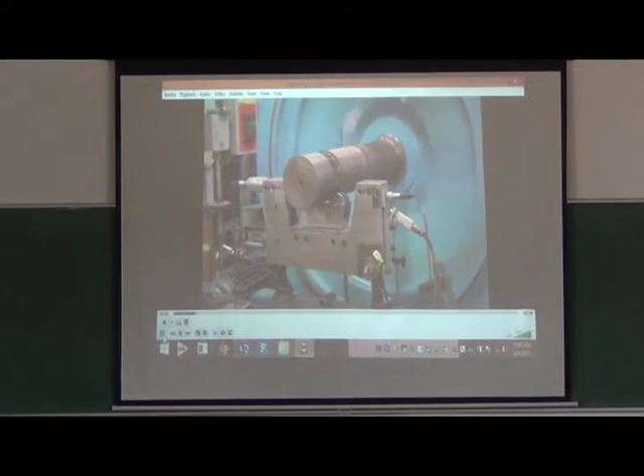So before balancing it was shaking like this.

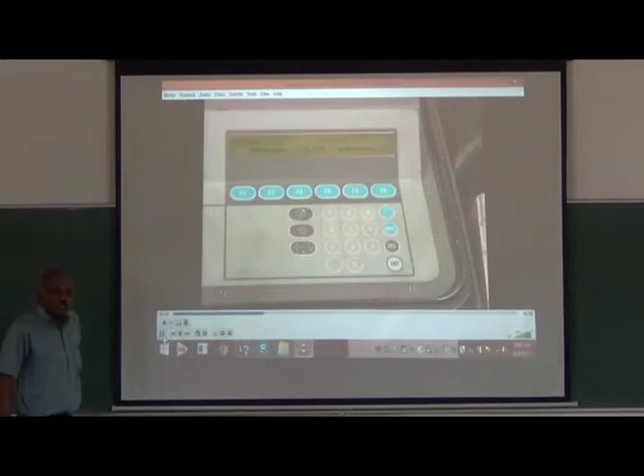You can see some sensors here. The impeller will be placed and you have the accelerometers which will measure the acceleration. Then there are a few stages of measurements for balancing, and that's what they are going to explain.

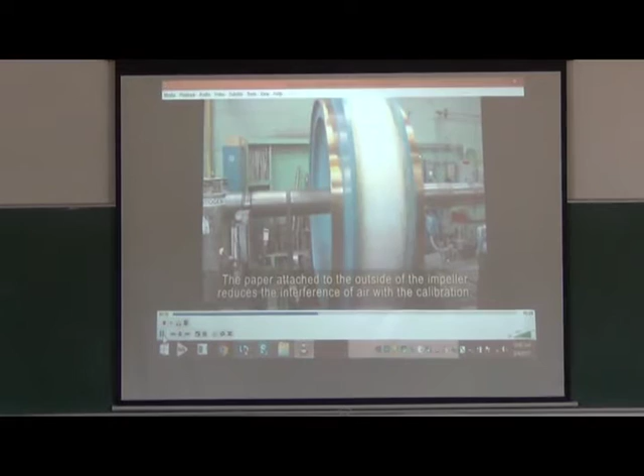So the impeller is first run, that is called a trial run. Then they will add some known unbalance to the system, and measurements are done again. Based on that, it will be able to calculate what the balancing masses are, at what angle, at what radius it should be placed, and that's what they are fixing.

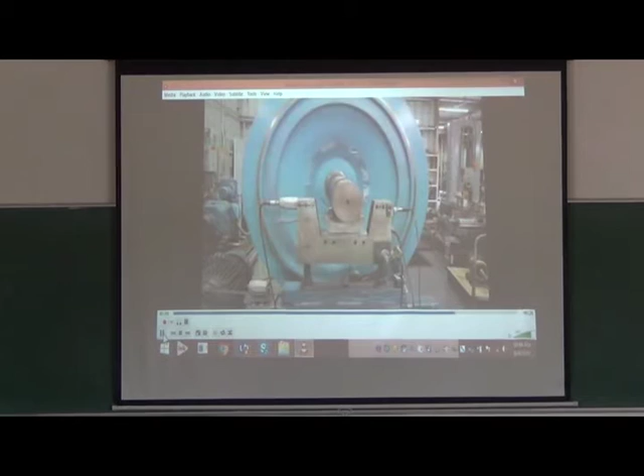So you see that the masses are added to achieve the balance. So what you have to do is, in a balancing machine, you keep your rotor running; that is called the first run or trial run.

Then, next run, you add an unbalanced mass intentionally at a known location and known radius, feed that into the program, and run it again. Then it will be able to calculate what the original unbalanced mass is, and tell you where to add the correction masses that you have to weigh and add.

So this is the procedure to be followed in a balancing machine. I will show you one more video.

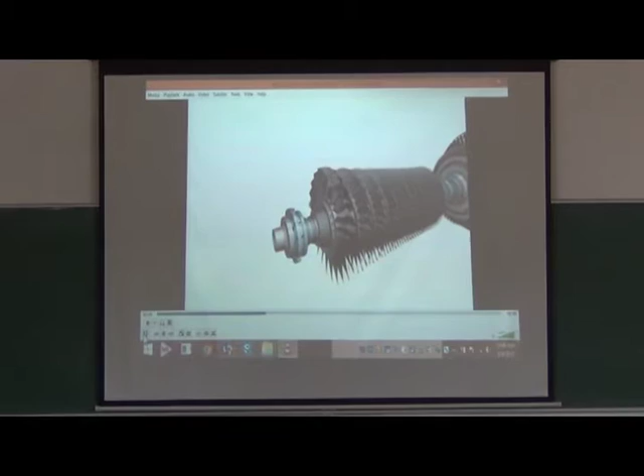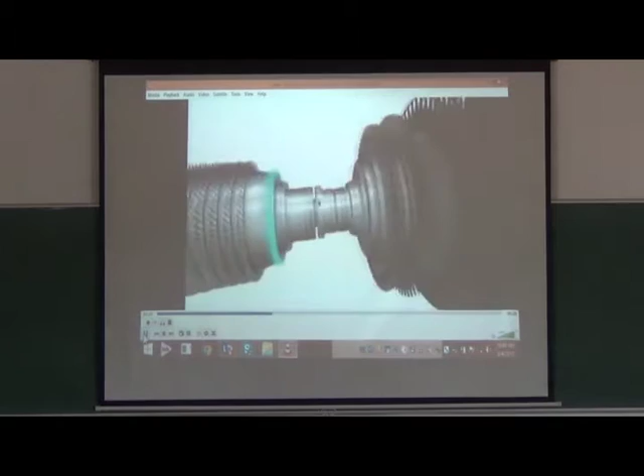Here you can see that the turbine has a number of rotor blades. You cannot disturb these blades for balancing because they are supposed to allow the flow of steam through it. So they have provided special planes, added rotors, on which the balancing can be done specially.

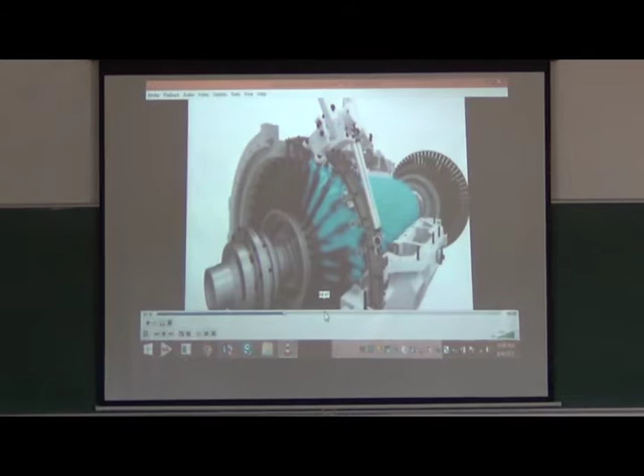I think there's some sound.

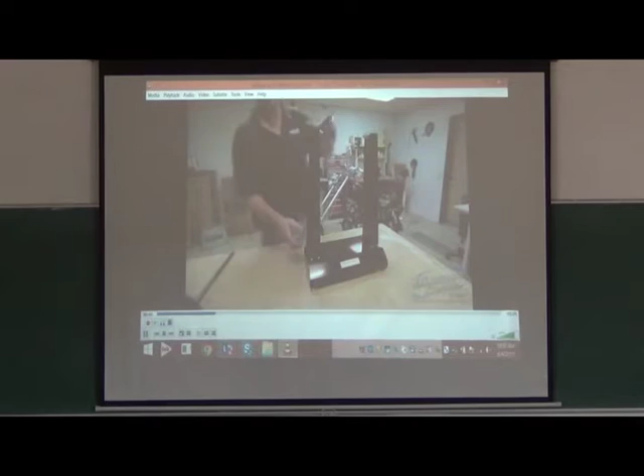Because this is going to be in a gravitational field, you have to align it properly, otherwise that itself will induce some error in your calculations.

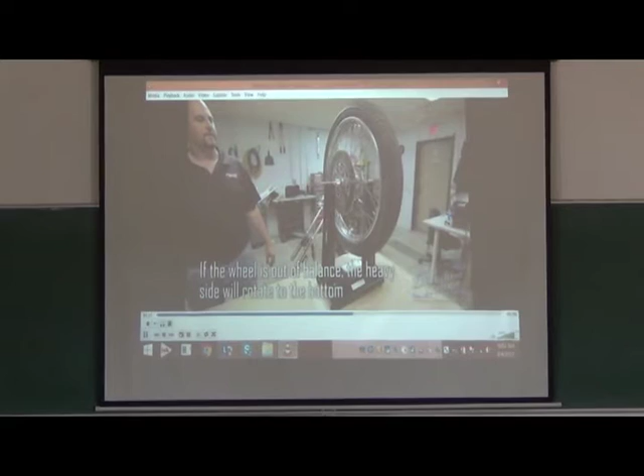Now it is suspended on bearings so that it is free to rotate. If there is any static unbalance, it will come to stop at the bottommost point.

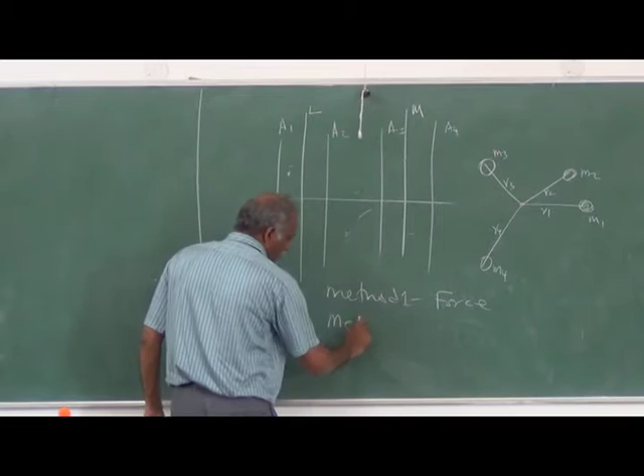I said there are two methods. We discussed one method last class. Method 1 can be called the force method, and method 2 will be called the couple method. So you have the force method and the couple method.

In the force method, if you quickly recall, the idea is taking one mass at a time and finding out the balancing masses to be provided in two planes. So we work out the balancing masses to be provided considering one mass at a time, for example m1, and find out these two.

Then you look at the second mass alone and find out the balancing masses to be provided in planes L and M. Similarly, you proceed for each and every unbalanced mass, and you will get to know the balancing masses to be provided in plane L.

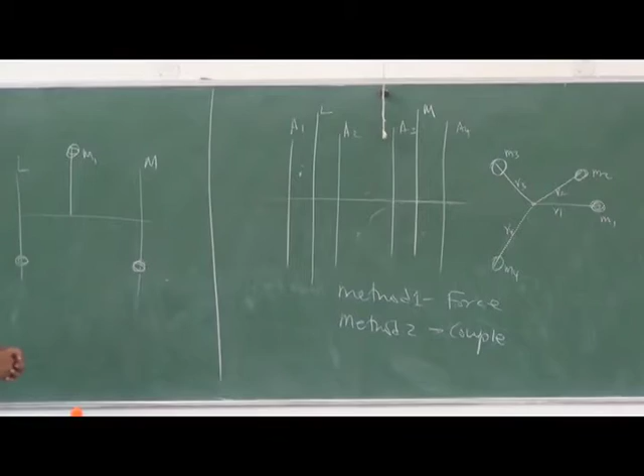Then you find out the resultant, not the equivalent, the resultant mass to be provided.

So once you do that, you will get the net mass to be provided at plane L and M, so that if you fix it there, it will cancel and balance the total system. That is the principle of method 1, the force method.

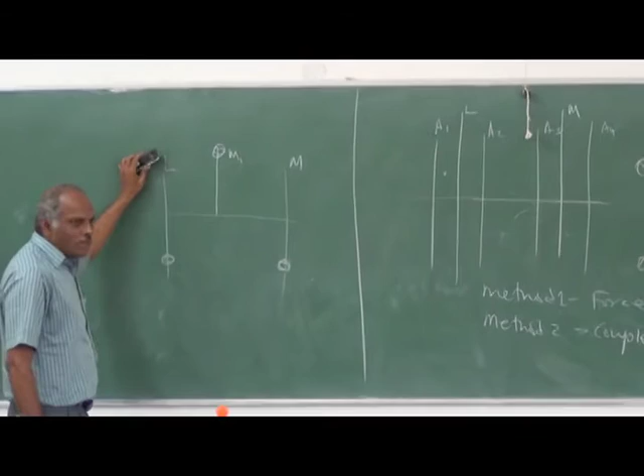Method 2 is the couple method, in which the principle is a little different, but I'll tell you that if you calculate the balancing masses to be provided at plane L and M using any of the methods, it should result in the same values. There should not be any difference.

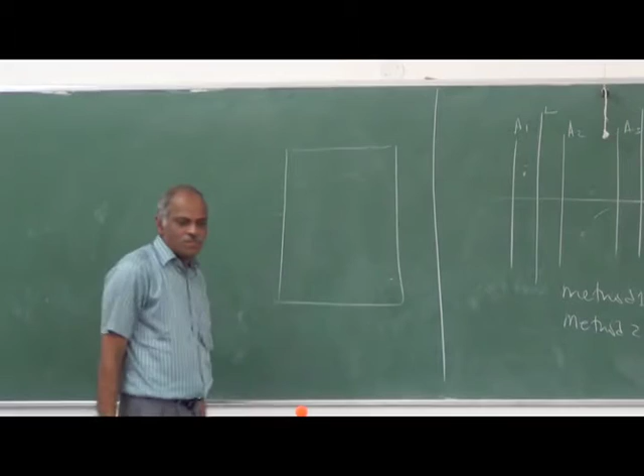So what is this couple method? You consider plane L, or any plane. For example, this is my plane that is matching with the board, and my unbalanced masses are like this. The balancing planes are perpendicular to this, and my unbalanced masses are there.

Think about only one mass now. This is going to, as it rotates, produce one inertial force in this direction. So I will transfer this force to this plane.

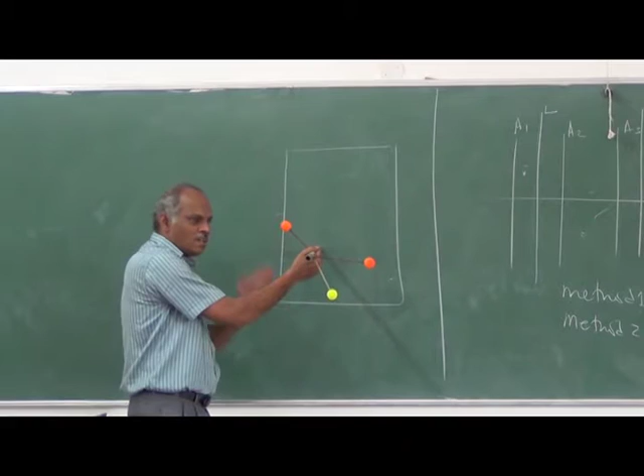Similarly, I will transfer all the inertial forces produced by these masses in this plane and find out the net forces and couple, and balance it. Find out the equivalent force that you have to give to balance the system of forces, and find out the equivalent couple that should be introduced so that the system is balanced.

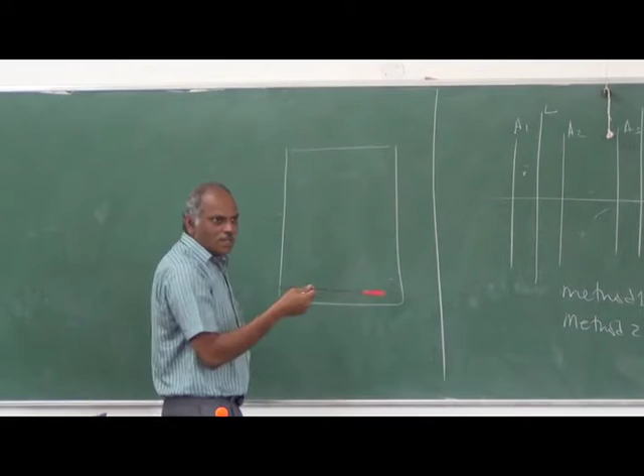So instead of taking 4 at a time, you think of one mass at a time. For example, there is a mass M1 located at a particular distance D. This magnitude of this force vector, you have to think of a shaft here. The magnitude is given by m1 r1 omega square, and the distance between that plane and this is supposedly L1.

This is your force, and this force is here. I shift this force away from this plane, I want to shift it here. Then, as you have learnt, if I shift the force F to this plane, it will have a force and a couple. So this is the force, this is the distance, and at what direction the couple will be.

So it will be the couple vector, introducing a couple, as we have been discussing. But if you think of this couple, it will be like this from here. So the vector direction will be like this. The force vector will be in this direction, and the couple vector will be in this direction.

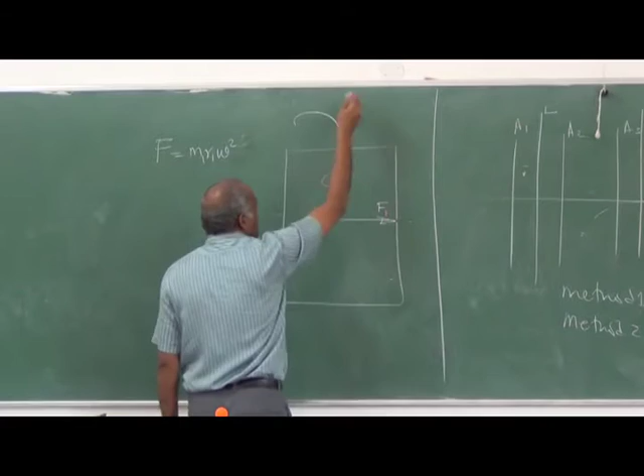That force, I am shifting it to this plane. When I shift it, it will have a force and a couple. Earlier we were not representing that couple as a vector, we were just saying the couple is represented like this, that's all, or we represented that as a torque T. But if you represent it properly as a vector, it should be perpendicular to the plane.

So here the direction is important, because we have a force here that is shifted by the same magnitude and the direction is conserved. But when you come to the couple, it will be here in the anti-clockwise direction, meaning it will be going up. You can check like this, it's going up. So your couple vector will be like this.

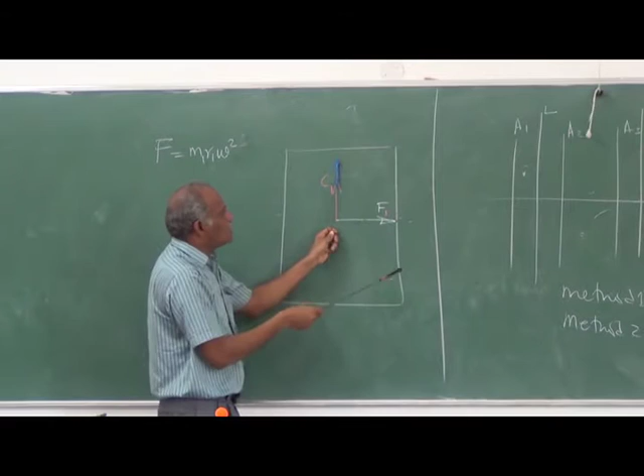Your force vector and couple vector will be there, perpendicular to each other. There is no issue about it, both will be perpendicular to each other.

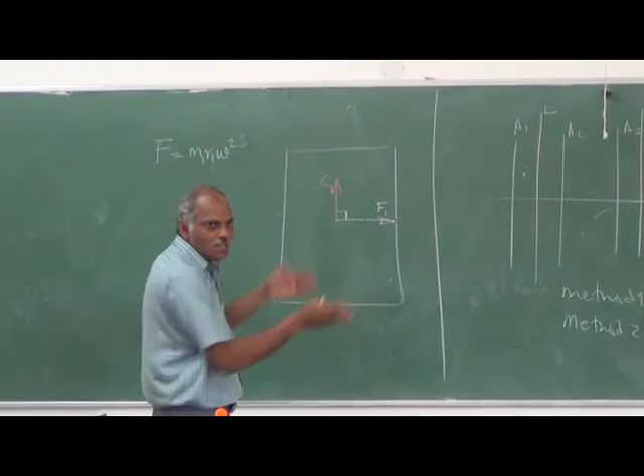So in method 2, what I will do is transfer the force, the inertial force created by every mass, into a single plane. In this case I will take this plane as L. So I have taken, for example, A2, and I would shift it here.

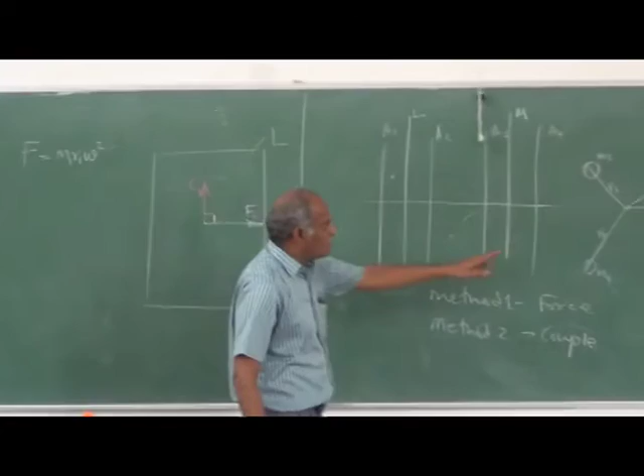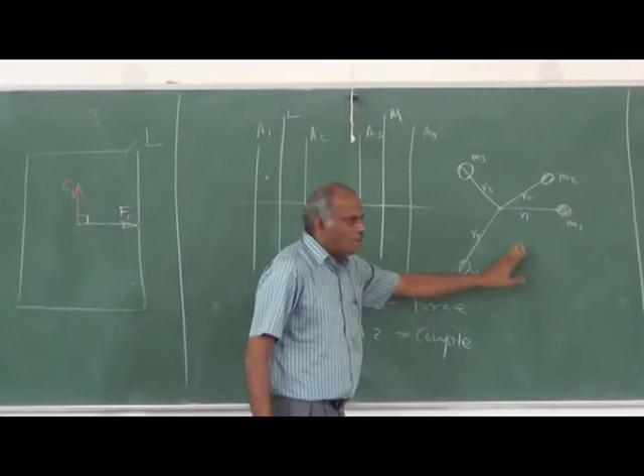Suppose I take the mass at A3, the unbalanced mass A3. Again that will introduce a force. This is how I shift it in principle. If you look at our specific problem here, this is the orientation of the masses. Let me take like this, I'll go by this. I'll have M2, the orientation of the force created by M2 will be like this, that is F2.

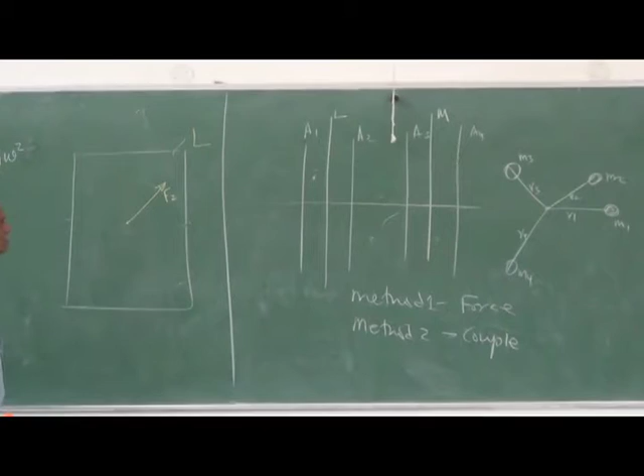And the couple is represented like this. I'll now take A3, that is a plane where M3 is there.

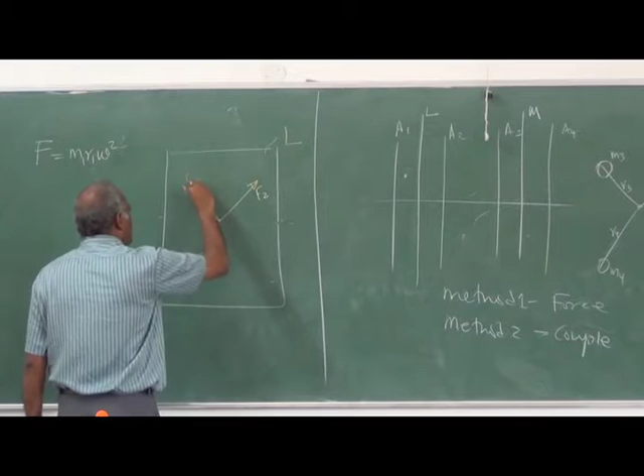So the force will be along this direction, that is your M3. So I can take that M3 like this, that is your F3. The force, and the couple created by M3, will be perpendicular to this.

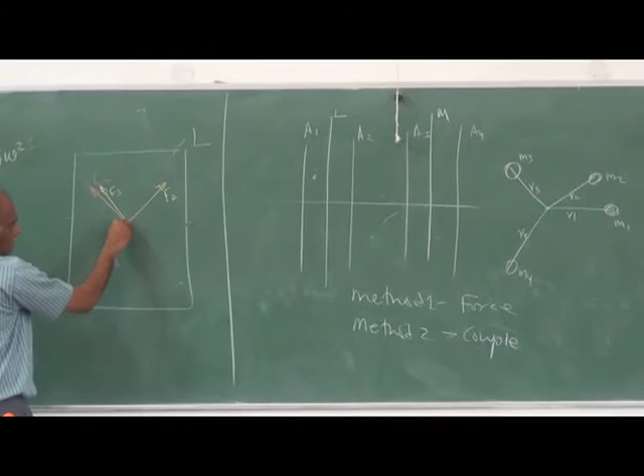That's C3. Then you have A4, that is here in this direction, so the force will be like this. This is F4. The couple will be perpendicular to it, that is C4.

The forces created by each unbalanced mass and the couple are represented like this. But I have not talked about A1.

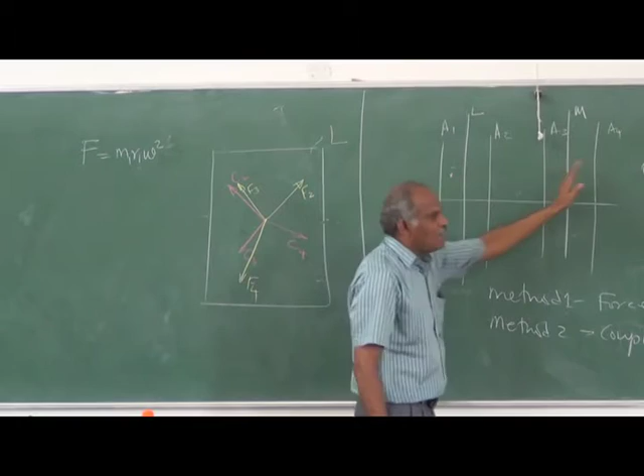The reason is that the difference between A1 and the other three planes is that A2, A3, A4 are on one side of the plane, whereas A1 is on the other side of the plane. So on the other side of the plane, the couple will be in the opposite direction.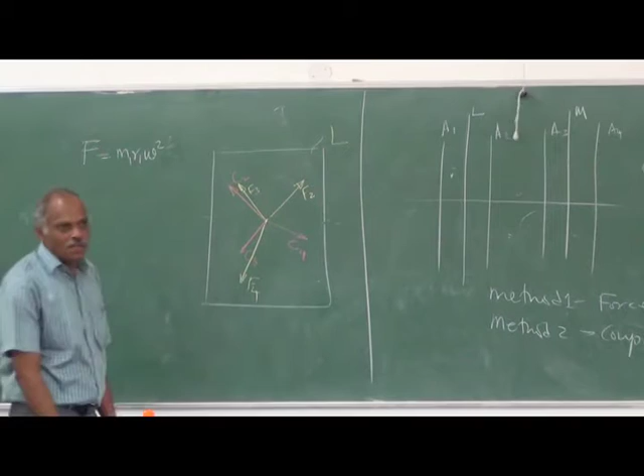So if I take M1 here, see what I have done: you check that the force F2 is here, and the couple is there by turning this in the anti-clockwise direction. The force vector is there, the couple vector is turned, but the direction is measured by turning this 90 degrees in the anti-clockwise direction. This is what happens to masses located on one side of the plane.

For the other side of the plane, if the mass is located there, the force is like this, F1, but the couple will be in the opposite direction, it has to be turned like this.

So the principle that we are using here is: shift all the forces to a single balancing plane. The procedure, or the important point to be noted, is that whatever mass is on one side of the plane, the couple vector will be turned by turning the force vector in the anti-clockwise direction. For the other side, it will be in the opposite direction, that is clockwise.

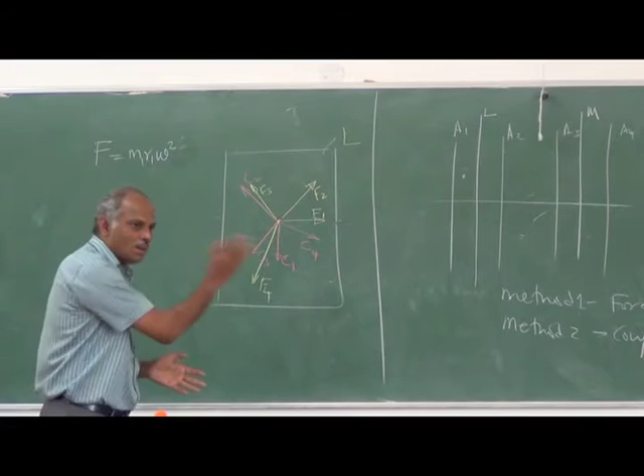So that is the basic idea. Now effectively you have transferred all the forces and couples to a single plane. Do you have any doubt?

Now what we are going to do is find the value of this couple, which we have not discussed yet. The value of the couple C is given by, for F1 this is C1, that is M1 R1 omega square into the distance between that plane and this, suppose that is L1.

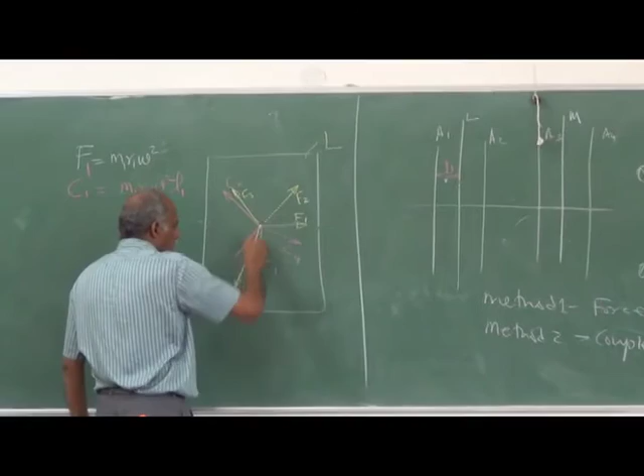Okay, so here you look at the couple vectors and force vectors. Drawing the force vectors is easy because you simply find the angle at which the masses are kept, and draw in the same direction. F1, F2, F3, F4 will all have the same orientation at which the masses are located.

But what about the couple? That is the nuisance. You have to see that it is turned by 90 degrees. If it is on one side of the plane, it should be turned in one direction. The other side of the plane should be turned in the opposite direction. That is what you have to do carefully.

Now let us ask whether any simplification is possible. In the balancing problem, in the first method, instead of drawing the force diagram, if you ignore omega square and just take the quantity M1 R1, it still represents the scaled down version of the force. It served the purpose. I don't have to calculate omega square every time and multiply by it. So for the balancing problem only, the force diagram can be a scaled version, dividing by omega square.

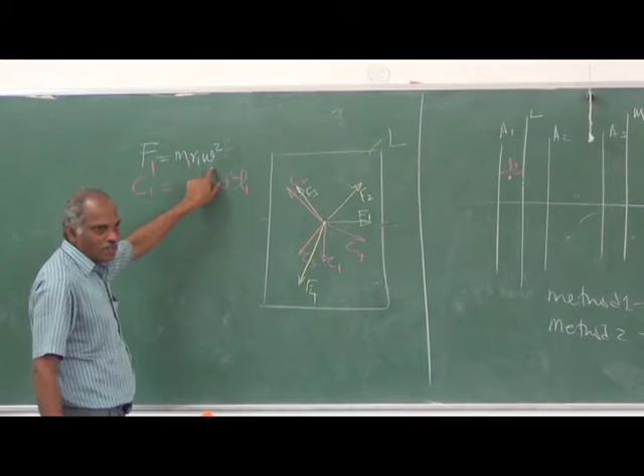Here, in a couple, also we will take omega square out, but is there any other way to avoid this confusion?

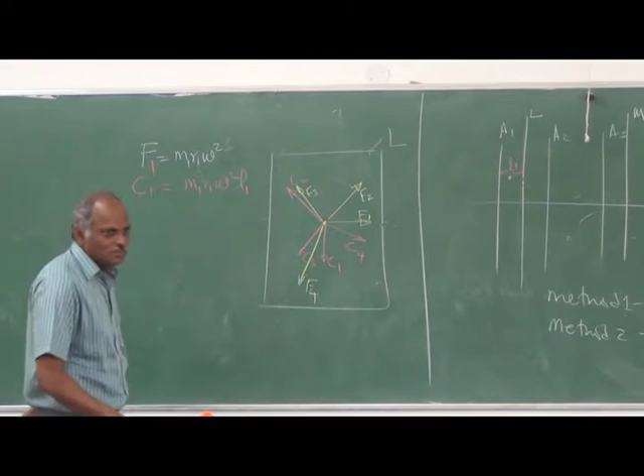So what will happen if I turn this entire couple system by 90 degrees in the clockwise direction? So now what I am suggesting is turn the couple vectors by 90 degrees clockwise.

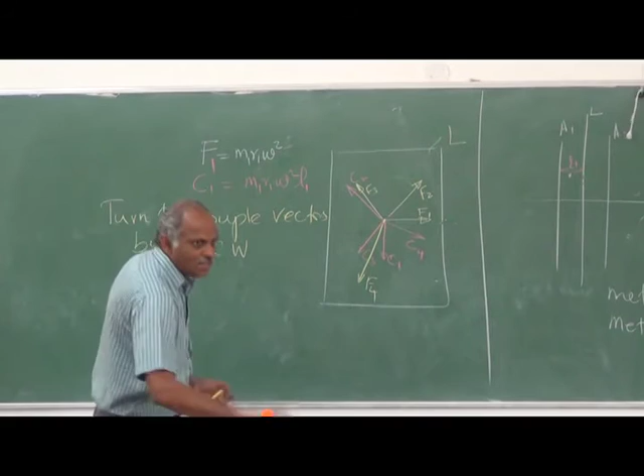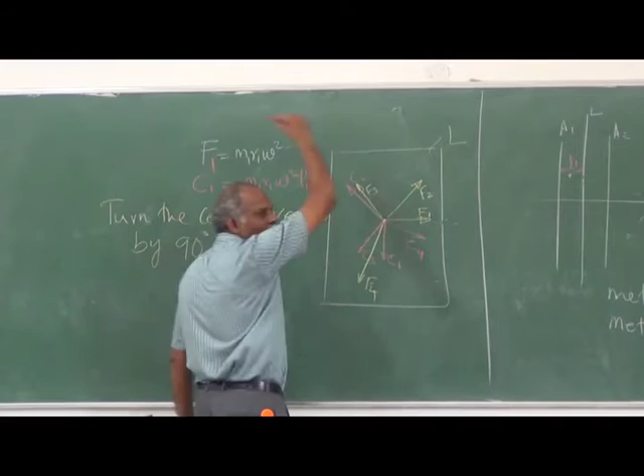Listen carefully. What will happen if I turn each couple vector by 90 degrees clockwise? So this is the couple vector C2, turn it by 90 degrees, it will be along the force vector. C3 if I turn by 90 degrees it will be along the direction of the force vector. C4 if I turn it by 90 degrees it will be along the force vector. C1 if I turn it by 90 degrees like this, it will be opposite to the direction of the force vector.

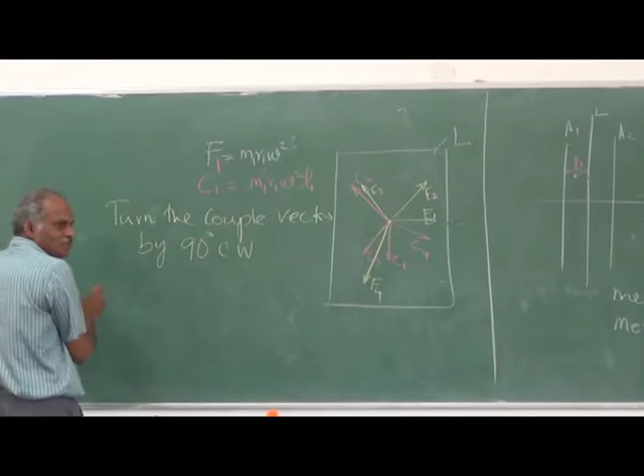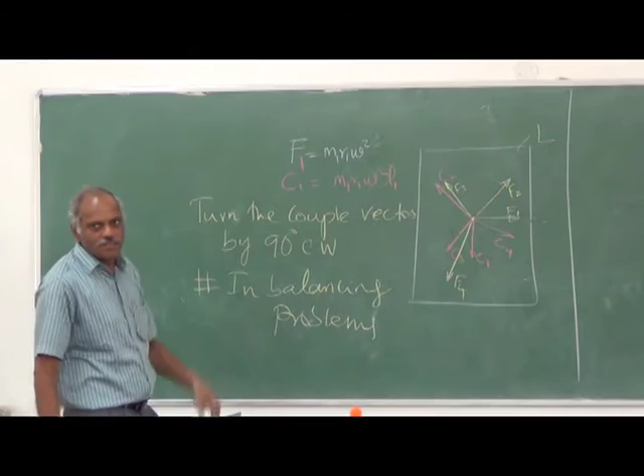So in balancing problems only, be very careful not to repeat this in other places. If you turn the couple vectors by 90 degrees clockwise, the direction of the couple vectors becomes very simple.

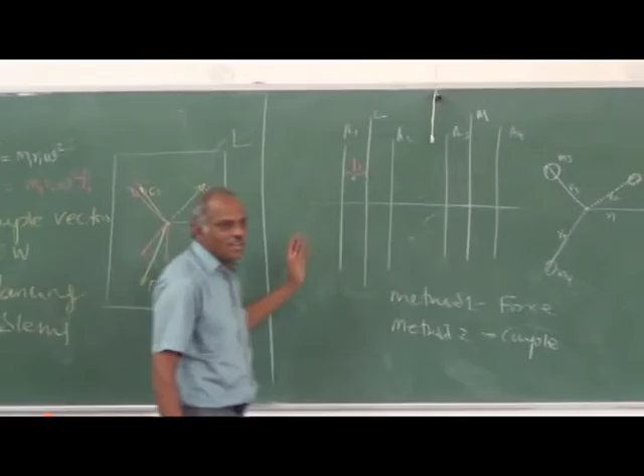Isn't it? So we are not violating the fundamental rule, we are using this particular small violation so that it will be easier for us to draw the couple vectors of these forces. Do you have any doubt, please?

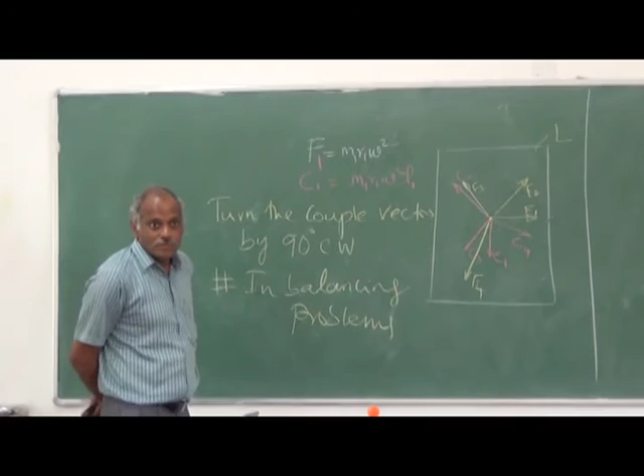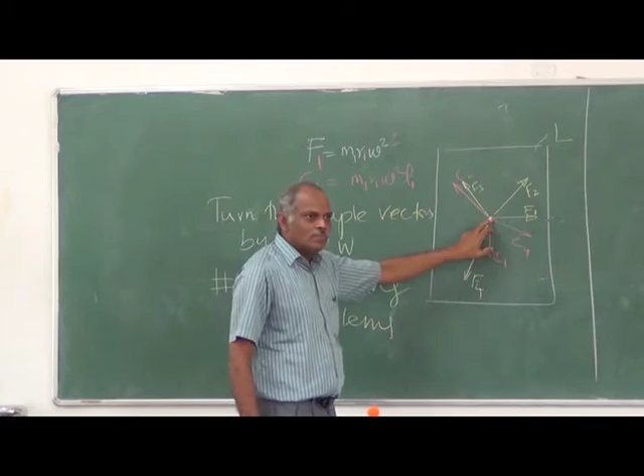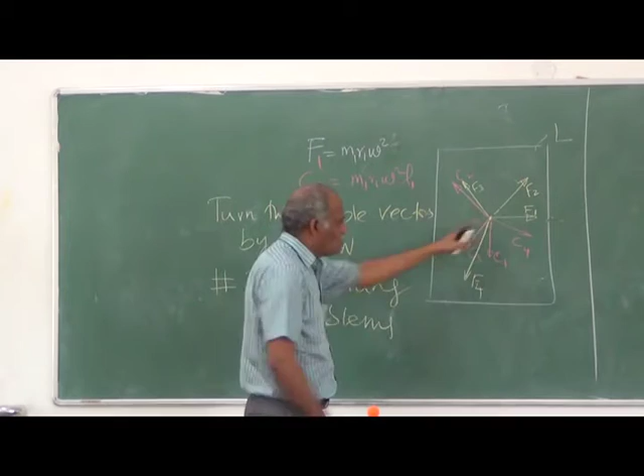So we are shifting the forces created by this into a single plane, and you are having a system of concurrent forces, a system of concurrent moments. So the couple vectors, if you draw the polygon using this couple vector, it should close. If it is not closing, then it is not balanced.

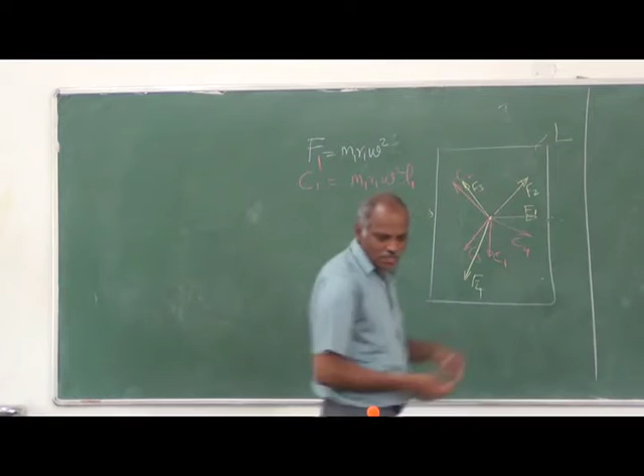Now what is the next step? Now you know how to compute the magnitude of the couple vectors. For the balancing problem only, you are permitted to draw them in the same direction as the forces, so that is easier for you. So draw the couple vectors of each one.

The couple vector of M1, you see the direction, that is M1, that is on the other side of it, so this will be your C1, and this will be your C2, and this vector will be representing C3, and the couple of this is C4. These four couple vectors are represented like this.

Now you draw the polygon. So you take it in any order. For example, I take C2 first, then I put C3 over here, then I can have C1, then I can have C4, like this. Now I have to find out, for equilibrium, this couple vector polygon should be closed. So I have to introduce an equivalent couple.

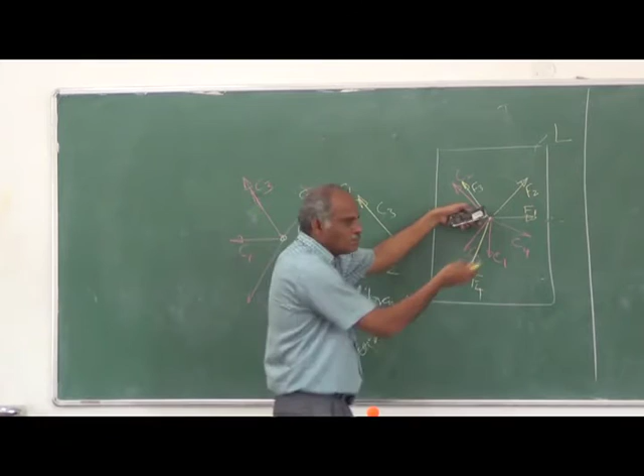How will this couple be produced? This is the equilibrium couple that you worked out. So this is going to be something like some mass at some radius, and it is omega square - though omega square is not taken consistently for all couple vectors. It is at a particular length L. So I have to introduce another force, another mass in this orientation, so that it will produce a couple vector that will balance it.

So in this system, what I have to do is introduce a couple in this direction. Let me rub this. So when it comes here, it is going to be your equilibrium couple.

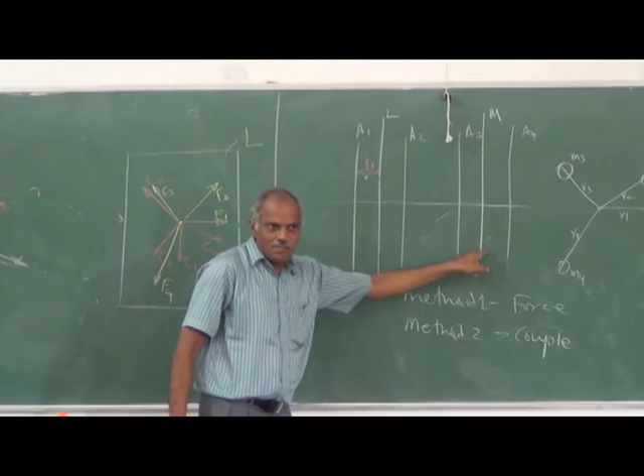For producing a couple, the force should be away from that. Where will I introduce that? I will introduce it in a balancing plane M. I have one more balancing plane M, and I will introduce that mass which will produce the necessary equilibrium couple. So this is the equilibrium couple produced by balancing, putting the mass at M.

So its magnitude, this measured value, is coming from the mass M. Then the distance between the two planes is D. Omega square is anyway not taken, so this is your value. What you have to find out is that M.

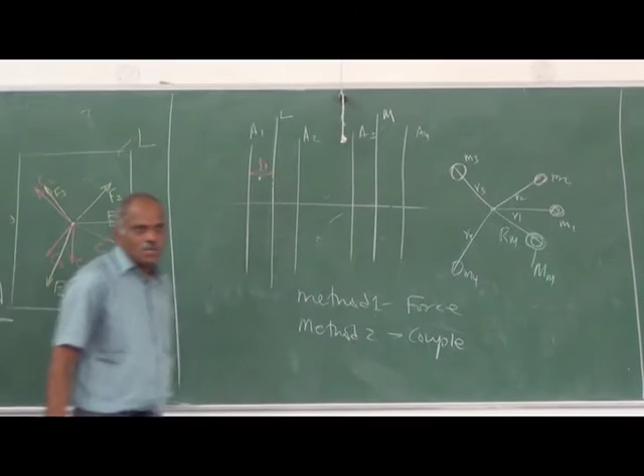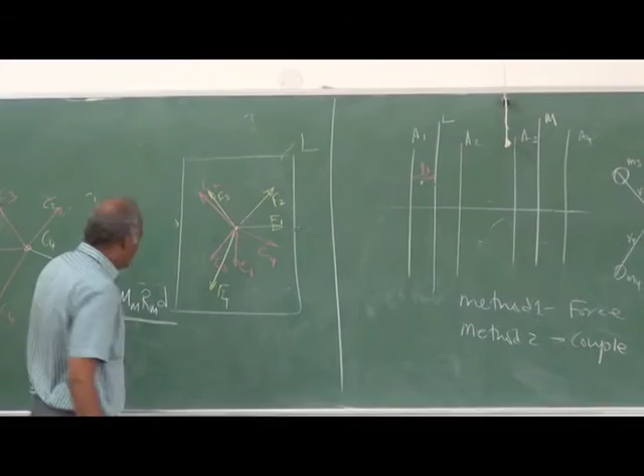So in this direction, preferably, this is the direction in which I will put the mass here at radius Rm in the plane M, so that when the force created by this is shifted to this plane, it will produce this equilibrium couple, and also it will introduce the force.

Think of it this way: now I am providing one more mass here at an orientation. I am going to shift that. When I shift it, I am sure it will produce a couple that will balance all the couples, but the force will come into existence. So when I introduce that here, you will have a force that is F.

And the couple of that will be in the perpendicular direction here. I think that is Fm - originally it will be Fm. That will be exactly at 90 degrees.

So what we are doing is introducing a mass, the balancing mass, at the plane M. When you shift that here, it will produce a force and a couple. This couple is the equilibrium couple, so the couples C4, C1, C3 and Cm together will balance each other. So I can forget about that, but that particular point is taken care of.

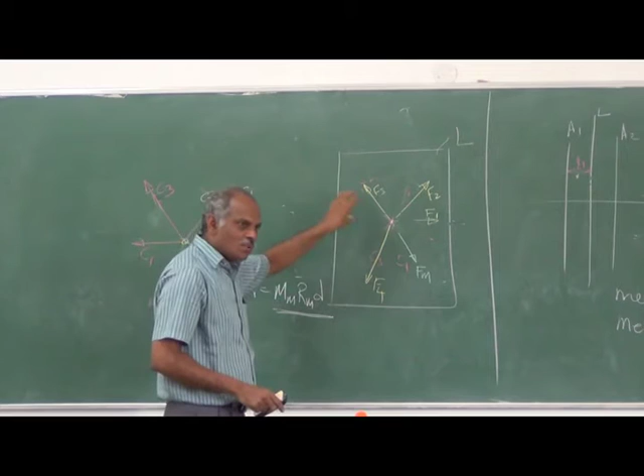So what is left is you have a system of forces to be balanced. What we do is draw a polygon and find out the closing side of that polygon, because you still have to find out the equilibrium force only. That is the mass to be placed in plane L, because you require only force, no couple, so that can be achieved by putting the mass only at this plane L. So that is the logic of this method too.

You have any doubt, please? Correct. So now when we are introducing the equilibrium also, over that also, should the original direction of that also be like a 90 degree? No. These are couples rotated by 90 degrees for convenience.

So whatever direction, that is the direction at which I have to provide the mass also. That is how I have decided this direction of the mass. So obviously that force will be in that direction, because this plane is on this side where everything will be considered to be along the direction of this. Suppose the plane is on this side, it will be in the opposite direction. Did I answer your question? Okay.

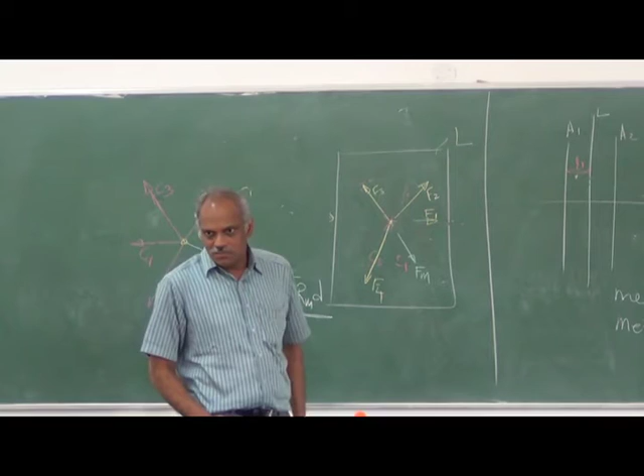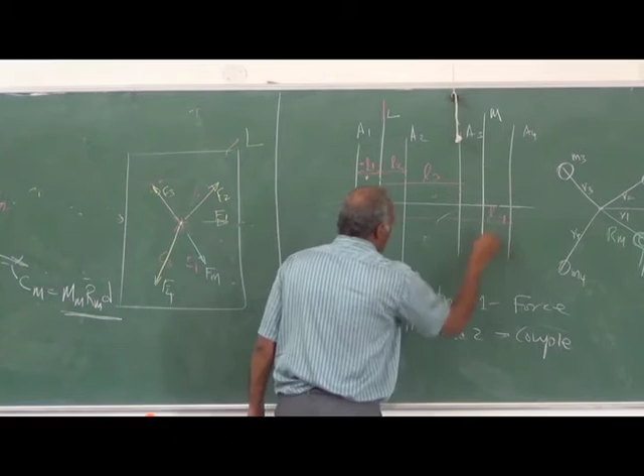So this is where you are vulnerable to make mistakes. What we do is, to know which side is plus and which side is minus, we can do a very simple thing. Taking this plane L as a reference, about which you are going to transfer everything, this side you can say is minus L1. Whatever distance you mark here, L2 is positive, L3 is positive, L4 is positive, this distance D is positive. By assigning the distance from this plane L, with one side all positive and the other side negative, automatically when there is a negative side, you are bound to draw the couple vector in the opposite direction. That's the way you can do it.

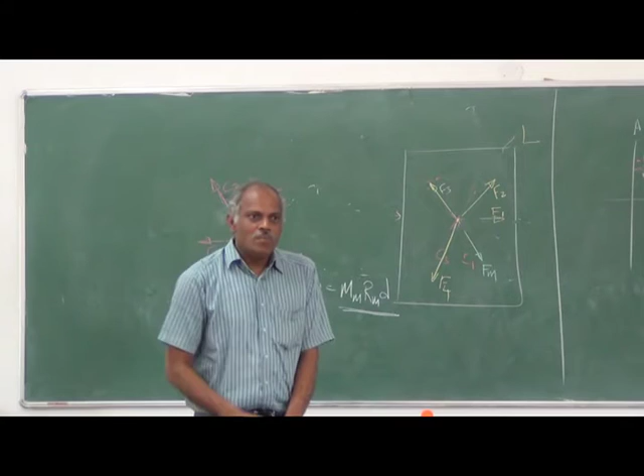But to avoid any sign error, the mistakes of plus and minus, a structured approach is there to guide you through - that is using the tabulation which we suggested earlier.

You can prepare a tabulation. That tabulation will consist of steps that will take you through it routinely. Let me quickly check, do you have any other question? Otherwise I will just draw the structure of the table.

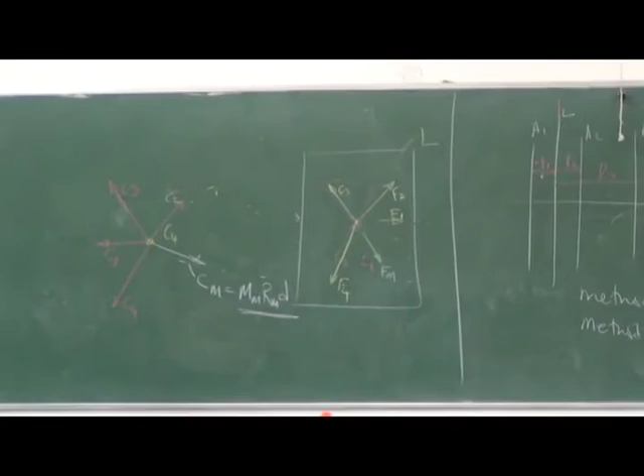Why do we first shift the couple in the direction of the force, then find the equilibrium couple, and then go to the force? Why do we do the whole thing this way, first find the couple equilibrium and then go to the force? Why do you first do the couple equilibrium, find out the equilibrium couple, then force? Why not the reverse? For example, if I do the reverse, I do not know this.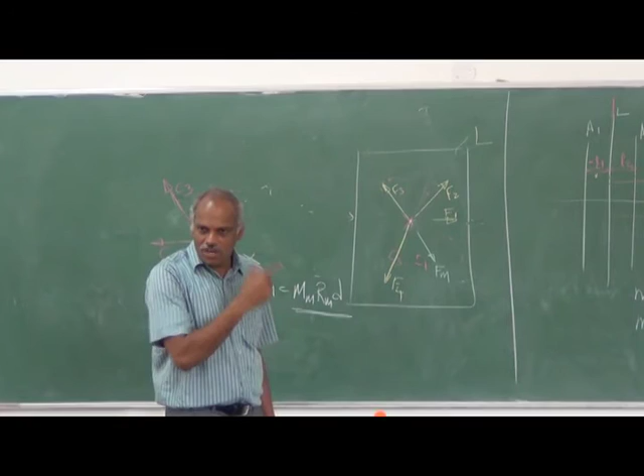What is the force acting on this plane M? I don't have any idea about what force is acting on plane M, or its direction, magnitude, and so on. If I do the reverse, I should be knowing all the forces except one. So here what is the problem? We do not know two forces.

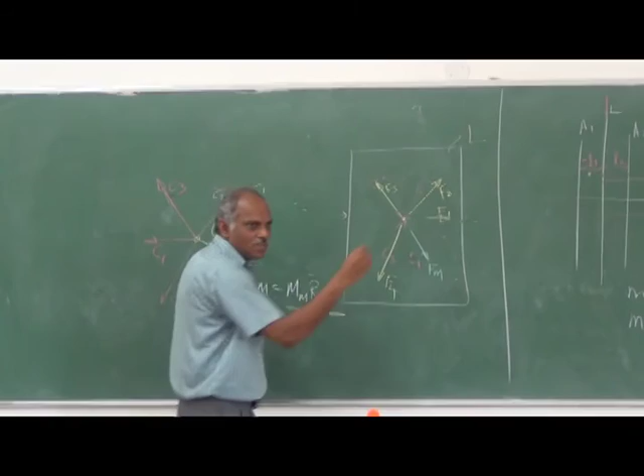So if you first follow the couple, it will come from the plane which is just away from it, so I can determine the force to be produced or the balancing mass to be placed in M. Then I can shift that here, so the couples will be balanced, but forces are still not balanced.

I draw the force vector. That's a good question, but if you follow the reverse direction, you will not get it, because you don't know enough forces to find the force equilibrium. So first you calculate the couple equilibrium, then ensure the forces are all in equilibrium. If you do the force part as well, you will get to know at what direction this is to be placed, that is M, L at RL.

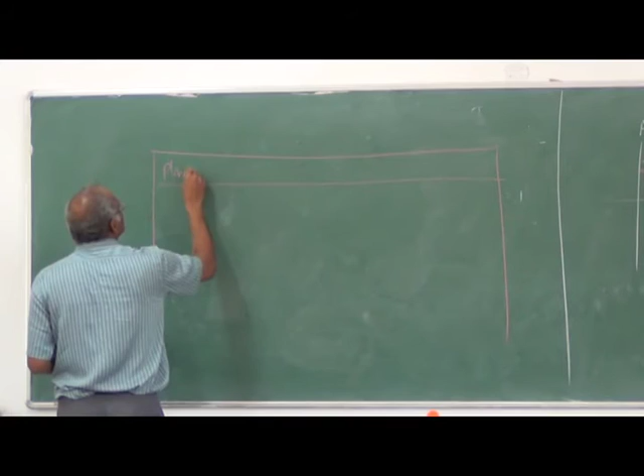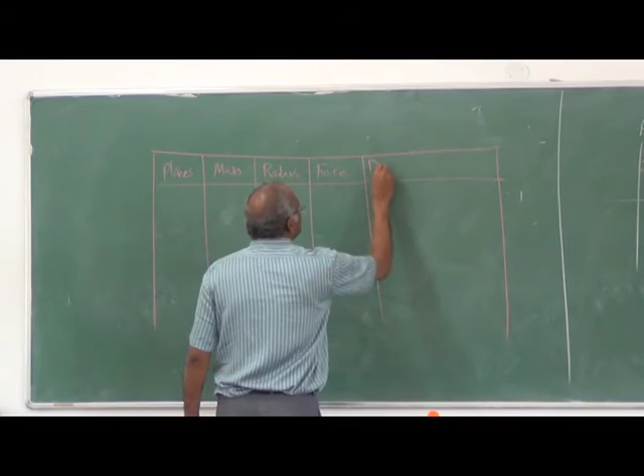Now the table approach: following these notations, I can prepare a table where you have plane, then mass, then radius, then force, then distance from L, then couple. The force divided by omega square, because we don't take omega.

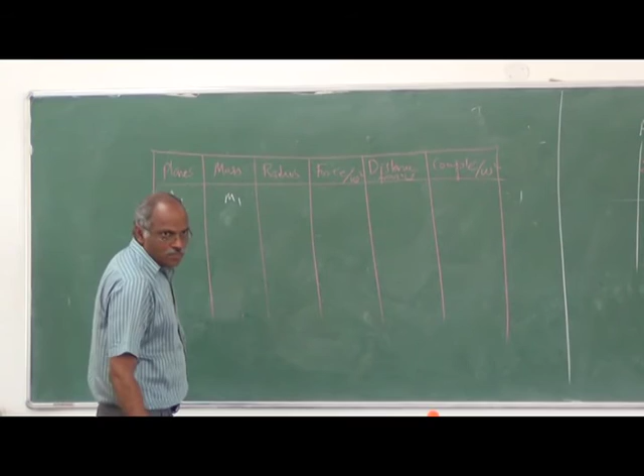Now if I prepare a table like this, you can take plane A1, mass is M1, at radius R1, the force is M1 R1 omega square divided by omega square. The distance from this is L1 minus, because it's on the left hand side, then the couple will be proportional to the magnitude M1 R1 L1, with a negative sign here.

Then plane L: this is ML, this is RL. We do not know this, but you just put the number ML RL. This distance is 0, so this will be 0. Then plane A2, this is M2 R2, M2 R2. This is L2, but it is plus sign, so you will have M2 R2 L2. Then you have A3, this is M3 R3, plus L3, giving M3 R3 L3.

Then you have plane M which comes next, so you have MM RM. This distance I'll call D, so you will have MM RM D, again positive. Then what is left is A4: this is M4, R4, M4 R4, plus sign L4, giving M4 R4 L4.

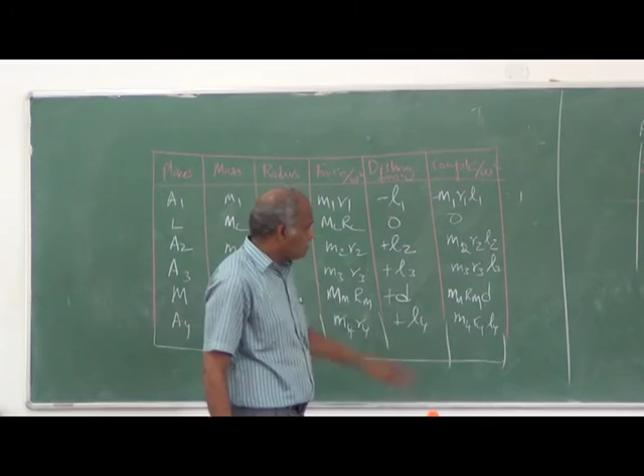So this table is to be filled up. When you are drawing the couple polygon, it is now clear this should be in the opposite direction to where M1 is. Of course this is 0, this is M2 R2 L2, with the magnitude of the couple vector in the same direction as M2. This is the same direction as M3, and this is the same direction as M4.

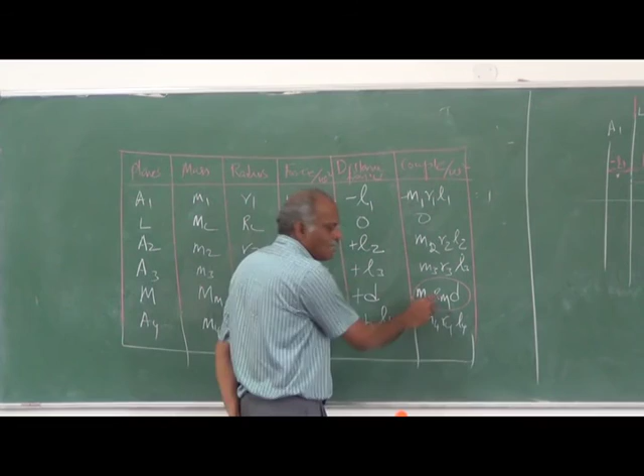You can draw this, only this is unknown. This unknown will be found out by getting the equilibrium of these couple vectors. So this M is known by dividing by whatever value you get. From the vector diagram you also know the angle, so theta M you can find out from the couple diagram. So this is complete now.

Then you can go to the force equilibrium using this table. So here, what are the unknowns? You can see that this is already computed, this is all known now. Only this is unknown, which you can find out by drawing the force vector polygon and finding the equilibrium. That will give you the direction and magnitude, so theta L you can find out.

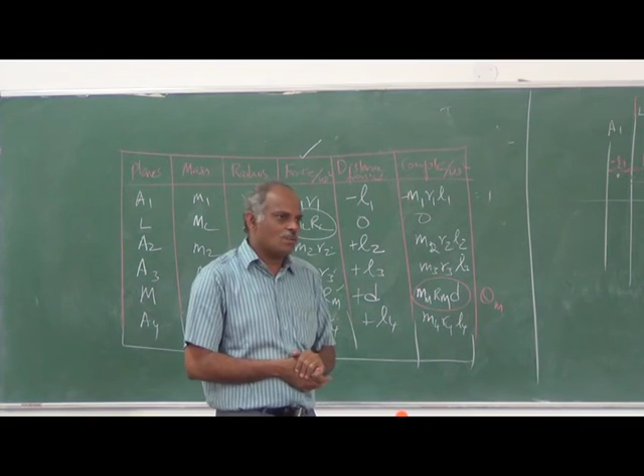So what you will be expected to do, since you are going to draw the vector diagrams, is to do it in the mini drafter session. The same problem will be given, and you have to do it using both methods and check that you get the same answers on both. That's where your learning will be complete. So we close.